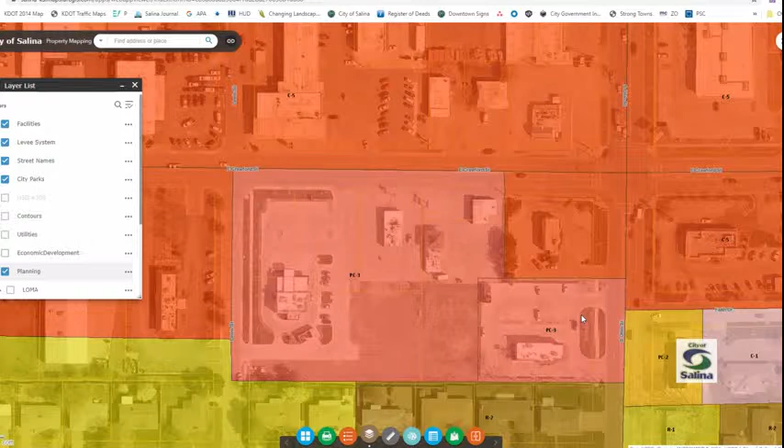That R1 property was rezoned along with a piece of ground that was also C5, where the Popeyes is currently located. And the reason for that rezoning was to take what we had, a mixture of C5 zoning and R1 zoning, and bring it under one unified zoning district, in this case, PC3. And the reason the PC3 zoning was required is because this area is part of a neighborhood center on the comprehensive plan. So we went from C5 and R1 to PC3. And that happened in April of 2018. So a lot of you will probably remember that.

Along with that rezoning to PC3, it did a few things. One is it brought forth the C3 bulk regulations and land use limitations and permitted uses. And it also required that any new development have a final development plan that is reviewed by the Planning Commission. Another condition of that PC3 zoning was the completion of the shared access road that is on the south side of this development, and we'll get into that when we get into the site plan here in a moment. So that's the current zoning of the area and how we got to where we are.

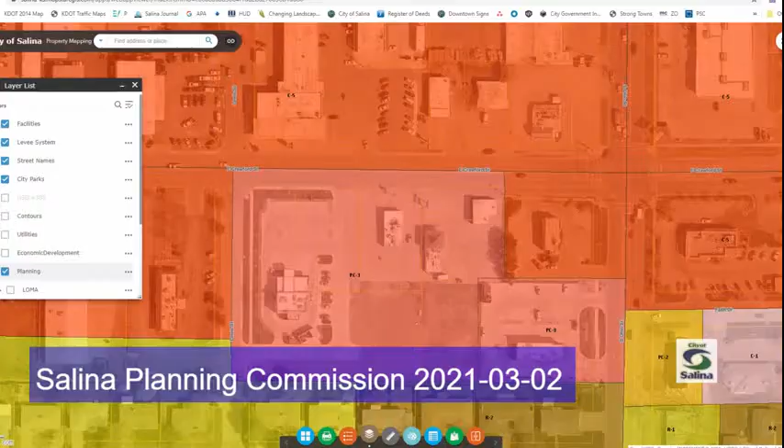The applicant, Mr. Jason Ingermanson, through Reimold Properties, Inc., is proposing to build a new Freddy's restaurant. And the Freddy's restaurant is going to be unique in that the only dining that they're proposing will be covered outdoor dining. So there will be no indoor dining. And the reason that is unique is the C3 district limits outdoor dining to no more than 50% of the indoor dining area. The purpose for that is the C3 district is intended to provide retail and shop experiences while limiting outdoor activities and display. So when you get into uses that have a lot of outdoor display and activities, those uses are usually reserved for a C5 zoning district and are usually prohibited in the C3 district.

And so in this case, we have an application for 100% outdoor dining, which the current C3 or PC3 district does not allow. So the applicant's seeking two things that you're going to be looking at and deciding on. The first thing is an amendment to the existing PC3 zoning to allow for unlimited outdoor dining, or 100% outdoor dining. And the second thing you're going to be reviewing is the approval of a final development plan that's going to incorporate a site plan, landscape plan, as well as building elevations that we'll look at.

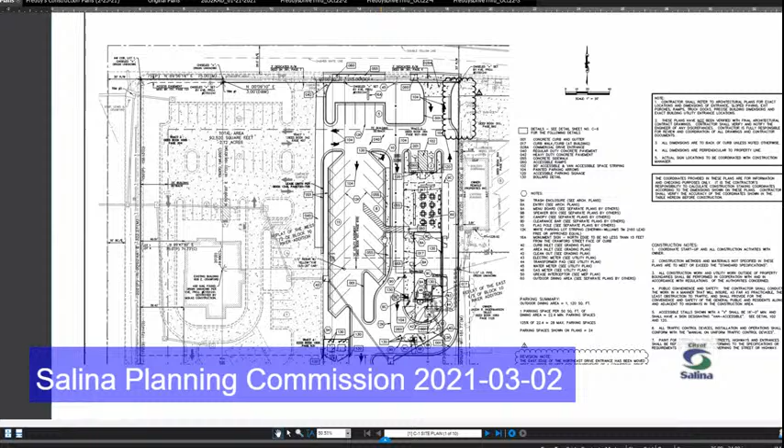In looking at the utilities, the site does have a number of utilities already in place that won't need to be upgraded or changed. So there is a 30-inch water line that is underneath Crawford, and that is paralleled by a 6-inch domestic access service line. There's also an 8-inch sanitary sewer that runs on the south side of

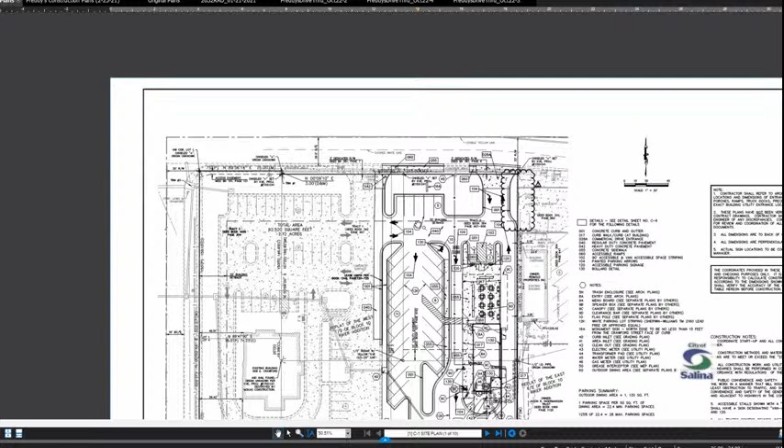And for drainage, there's a 24-inch storm sewer system underneath Lewis and Crawford, and it's collected at the intersection over here. You can see some of those details in the site plan where that stormwater runoff is collected and then goes into the public system for drainage. The Riker addition, which this property is part of, was platted prior to 1980 and therefore is not subject to any stormwater detention requirements or special drainage studies.

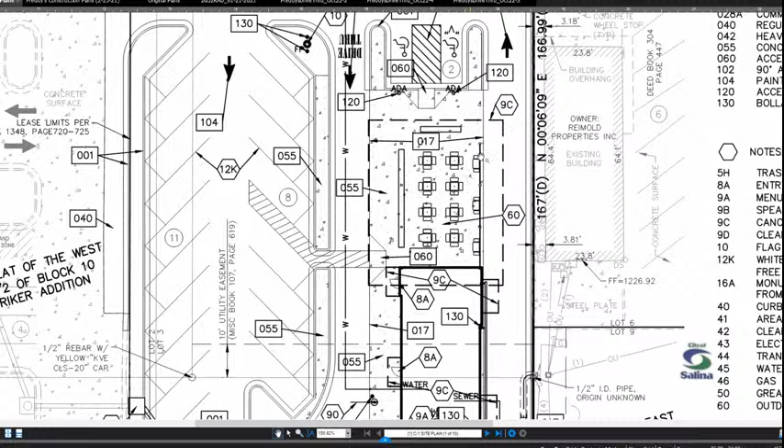The building itself is oriented north to south primarily. We have a canopy, which is this dashed line that you see here in the site plan. As I zoom in a little bit, I'll try to get it a little bit tighter yet because it's kind of hard to make out. We have 41 feet of frontage that face Crawford, and then our depth, we have 104 feet from the north edge of the overhanging canopy to the south edge of the building.

The building is accessed through two doors that are on the west side and face the parking lot. So the parking is primarily on the west and northwest side of the property and is separated from the drive-through area by a raised curbed island area. So there's a little bit of a refuge area for pedestrians as they go from their motor vehicles and they're walking to the restaurant. The two doors that face west are for two purposes.

The south door is the entrance for the employees that are going to be working inside the kitchen and providing service to the customers and patrons. The north door, which is shown here, is the restroom that is accessible from an exterior door for people that are coming to eat and enjoy the Freddy's service and food.

On the east side, you have two windows, two drive-up windows, one for paying and taking care of your business transaction, and then the other is the actual pickup window. And there's also an ordering station on the southwest portion or corner of the drive-through. So the drive-through looks like this, where you come in the entrance and you come around the west side of the building, then around the south side of the building, and then the east side.

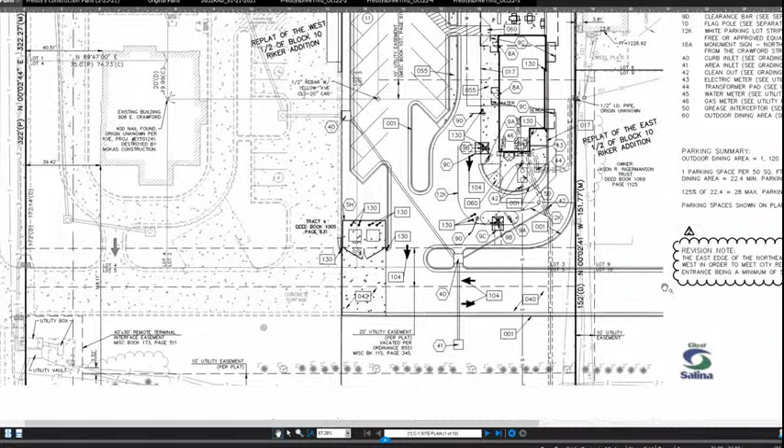And the east side is where you pay for your food and you pick up your food, and then that directs you straight out of the exit. So you can exit directly out into Crawford, or you could loop back around the parking lot and access the shared access road, which will give you direct access to Lewis. Or if you're looking to take a right turn south on Ohio, you can actually go through the Popeyes lot further to the east and take a right out on Ohio.

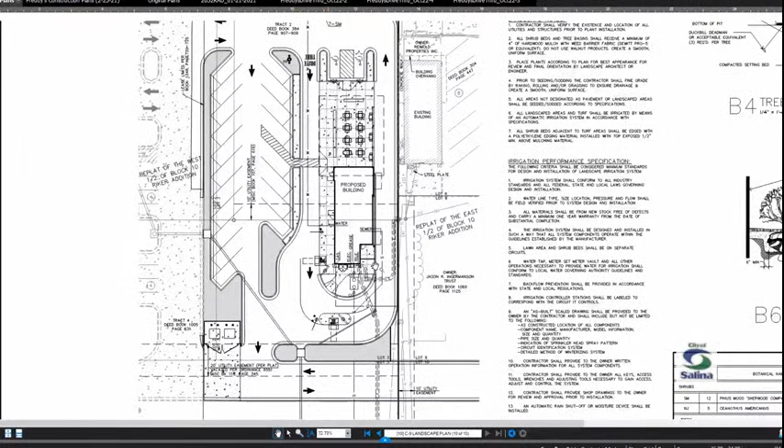When we look at the area of paving and building and landscaping, what we see is that the building is 3,400 square feet, and that amounts to a little over 8.5% of the total lot. Then the paving area equates to 25,728 square feet, which is over 65% of the total lot, with the remainder, 10,194 square feet, being composed of the landscaping, which you'll see is the shaded area on this landscape plan.

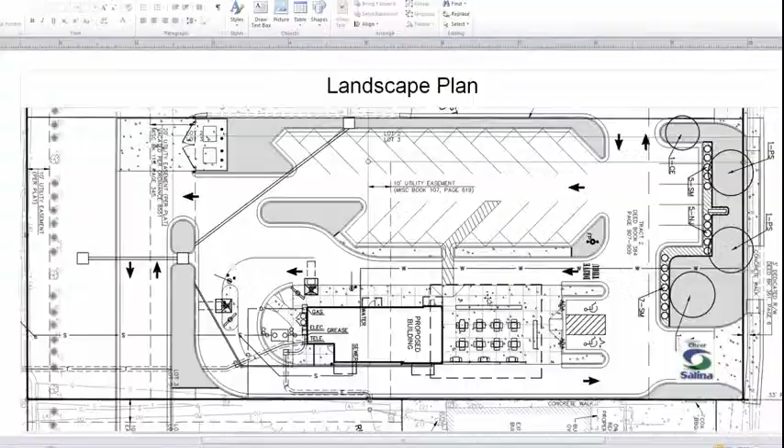Looking at building design, we do have the applicants who will help us with this a little bit, but we have a situation where we have elevation drawings, but they're black and white, and we have some color renderings, but they're not the most current model that's being proposed. And so we'll have the applicant help us paint the picture of what's different between the two, but I'll do my best to fill in until we hear from the applicant.

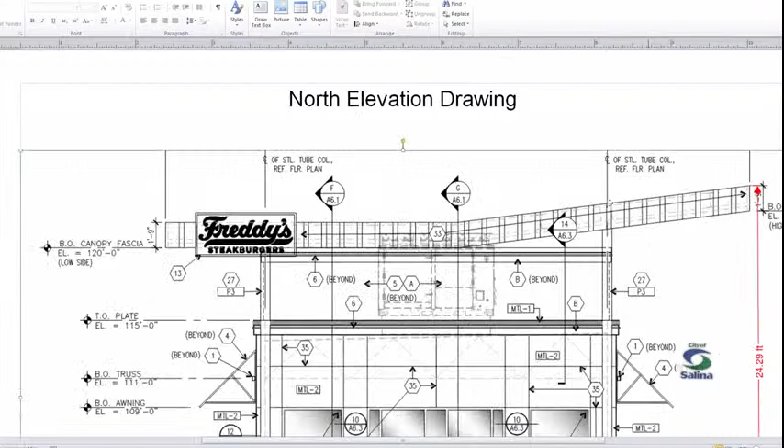So here's the black and white version. I'm going to take you to the color version first, simply because I think it helps give us some context, even though it's not 100% the same. It's going to take a moment for it to load up here.

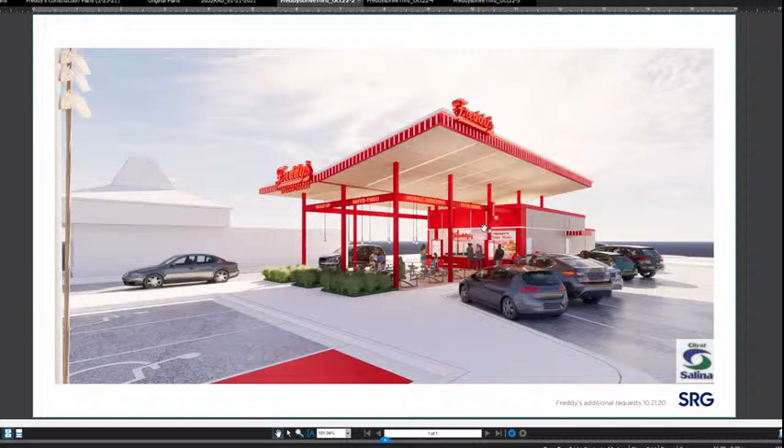That's a good looking building. Yeah, it's still waiting. Oh, there it is. All right.

So this is the color rendition that we were given initially, and since then, a different model has been selected for Salina. But I think the canopy is going to be fairly similar to what is being proposed. The difference being, I think there will be a cabinet sign on the north face, just on the north face, that has a Freddy's rather than the channel letter signs that you see on this particular model.

And then the front of the building, about where my cursor is, the bottom 4 feet is going to be a red brick masonry on the model that's being proposed by the applicant, which is different than what we're seeing here. I think the windows are probably the same or very similar. And then there is an architectural red metal paneling on the north facade above the brick, which is going to be similar to what you're seeing in this rendition here.

And then the brick wainscot will wrap around the side for a little bit of distance where my cursor is. And then the awnings are a little bit different on the model that we're looking at compared to the rendering that we have in the photograph here. So now I'm going to go back to the black and white and see if we can properly describe those differences or see those differences.

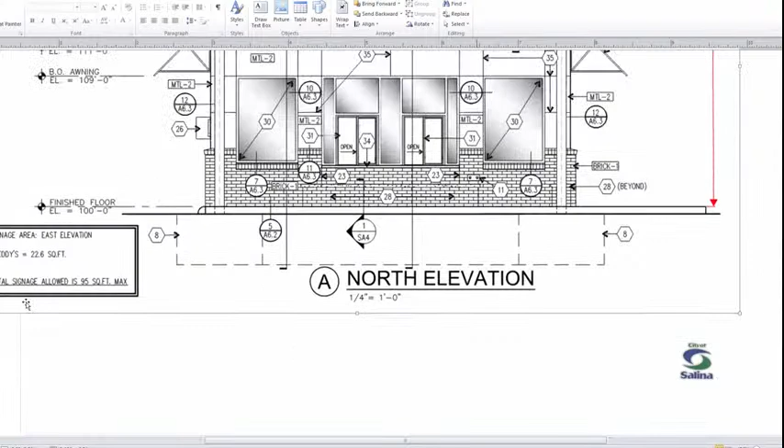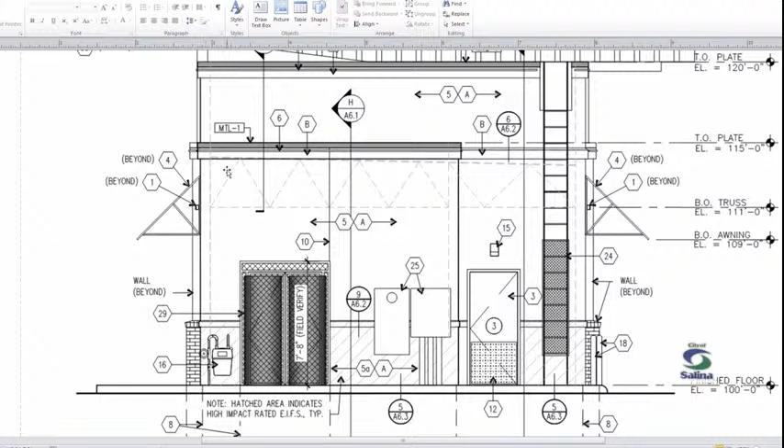Get to the south. South elevation is primarily going to consist of an EIFS material that is going to be a khaki color. And I don't know that there's much else to be said about that. There is going to be a mixture of what I understand to be white horizontal paint colors with an elevated architectural texture to it, or an elevation change at the top, as well as some red coping.

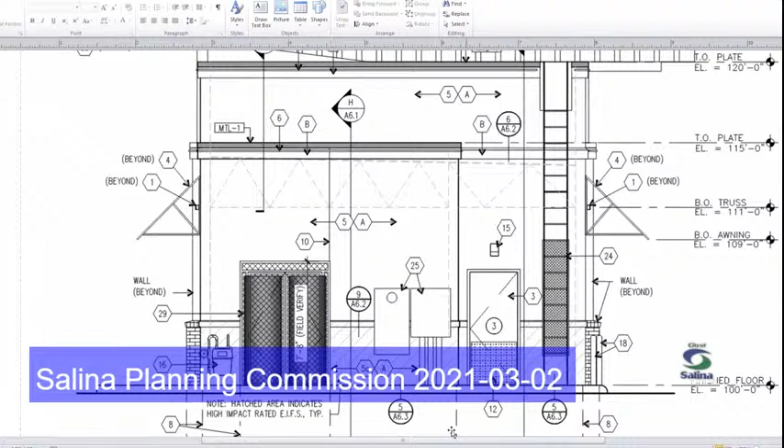Very... see the shaded area. I'm understanding that to be a red metal coping that's going to cap the walls. And that is probably pretty similar to what we see in the 3D renderings.

Here we have the east elevation, and the east elevation has the drive-through windows, the one where you pay, as well as the one where you pick up your food. The awnings here appear to be a red with white striping, and they appear to be more of a slanted architectural design versus the horizontal awnings that you saw in the 3D rendering.

And then as you get towards the north end, you pick up the wainscoting of the red brick. And then you have the canopy to the north of that with the outdoor seating. And there's an iron railing that creates the edge or the buffer between the drive-through area and the dining area.

On the west elevation, you have the restroom entrance, which is the north door, and you have the employee entrance with the south door. And then you also have those same awnings that match the awnings that are on the east side above the drive-through windows.

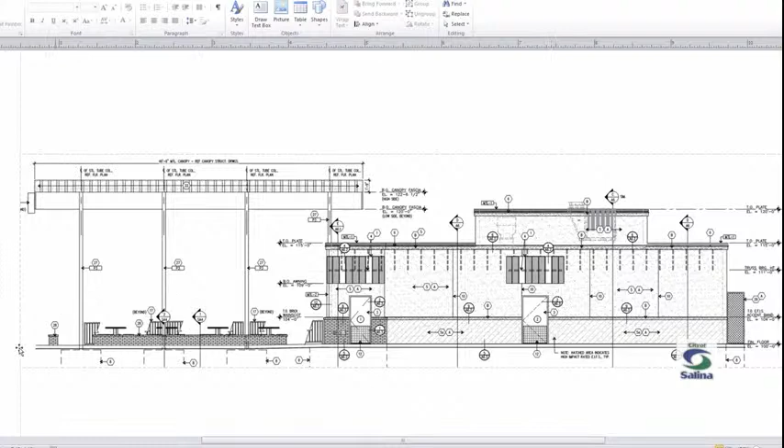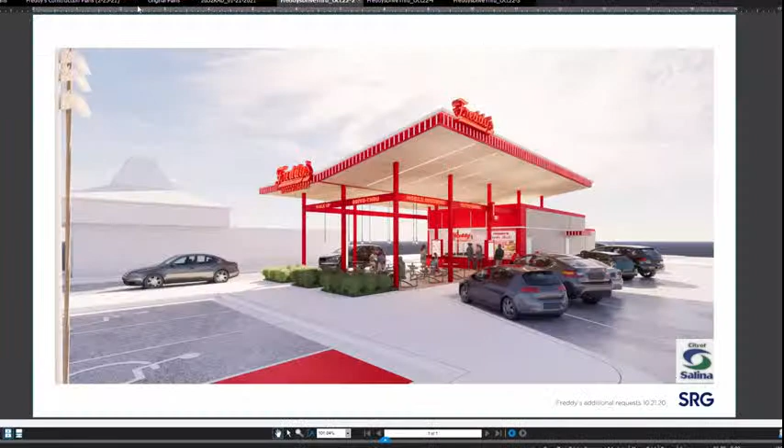For off-street parking... Dustin, what's EIFS? So EIFS is an insulation product that is a finish that looks a lot like stucco. Okay, so it has a texture to it, but for the most part, it's a smooth texture, and it can be colored a lot of different ways.

Let me see if it shows up well in the rendering. This rendering maybe shows a little bit better, but it has a flat surface to it. But if you look at it closely, it's going to have almost like a stucco texture to it.

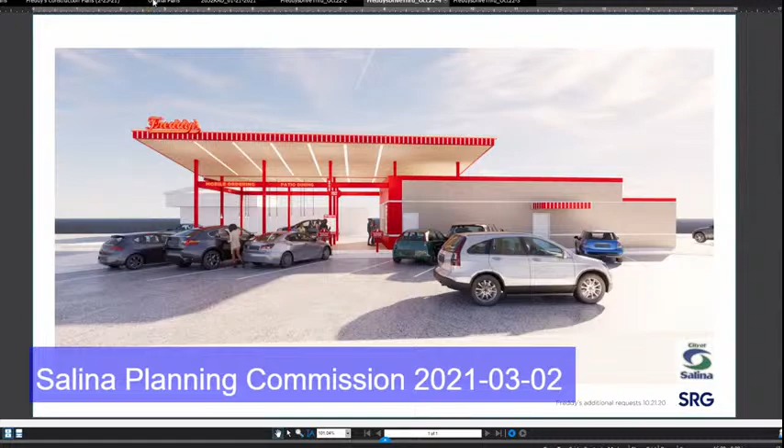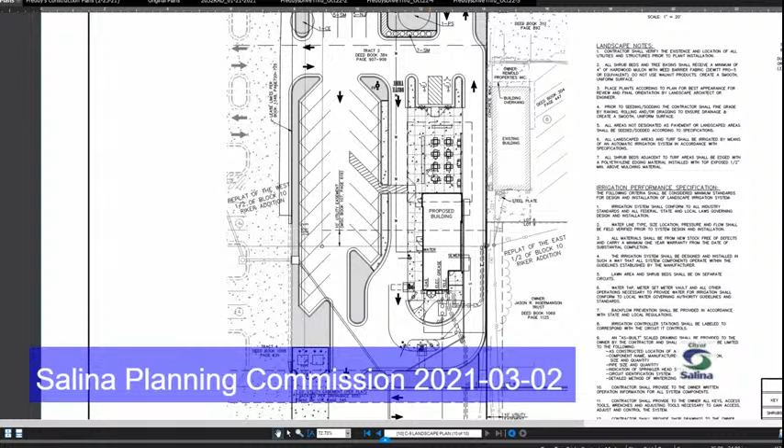Okay, so I think we were at parking. So for parking, this particular property is a restaurant, and for restaurants, we require 1 parking space for every 3 seats, or 1 parking space for every 50 square feet of your dining area. So in this case, the dining area is the larger of the 2, so that's what we use.

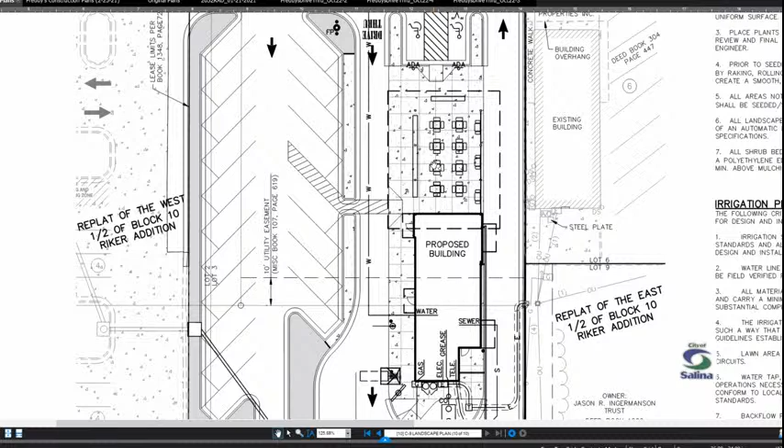We have over 1,100 square feet of outdoor dining area, which requires 22 off-street parking spaces. The site plan that's being proposed has 24, 2 of which are ADA handicap accessible. So that would meet the required off-street parking and actually exceed it by 2 additional parking spaces.

Site plans for restaurants are also required to have a loading, unloading area for supplies such as food and materials and things like that that are required for their service operations. And in this particular case, the applicant has provided us with a written letter on their letterhead describing that their deliveries of their supplies are going to take place during off business hours.

And so they don't have a dedicated loading, unloading zone, but there is plenty of space within the circulation of the site for that loading and unloading to take place during off business hours. Landscaping: this site is required to have 2,460 square feet of landscaping area. The proposed plan has a little over 2,500, so we do meet the landscape area requirements.

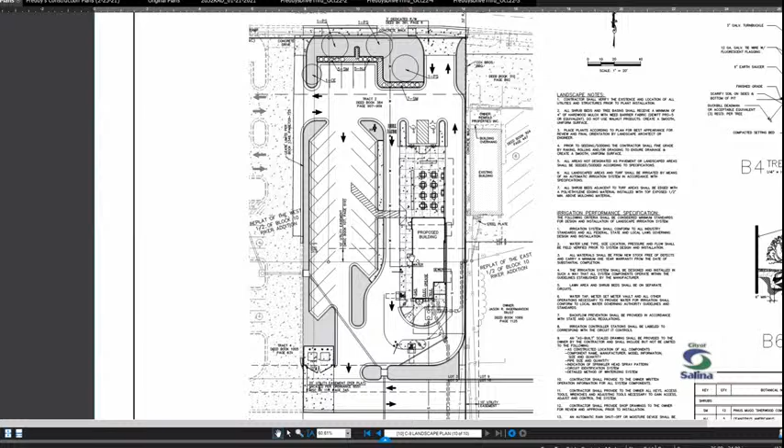There's also, in addition to the front yard landscaping area, 4 islands and peninsulas within the site that add an additional 2,500 square feet of landscaping area. And the front yard area that is along Crawford is enhanced with 4 shade trees and 17 shrubs for parking lot screening.

In addition to the landscaping that takes place in the front yard and throughout the site, there's also a 39-foot wide buffer towards the south between the shared access road and the south property line. And that area has already been landscaped and screened as part of the first phase of the redevelopment of this property that took place with the Mocha's development. So if you go out there today, you'll already see a number of screening plantings in that 39-foot buffer.

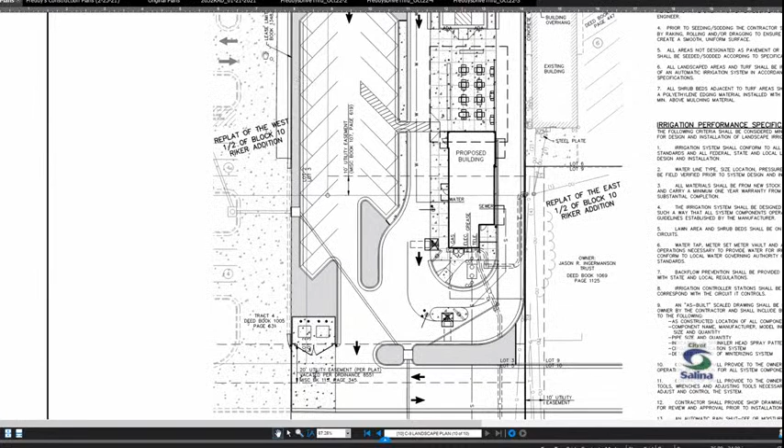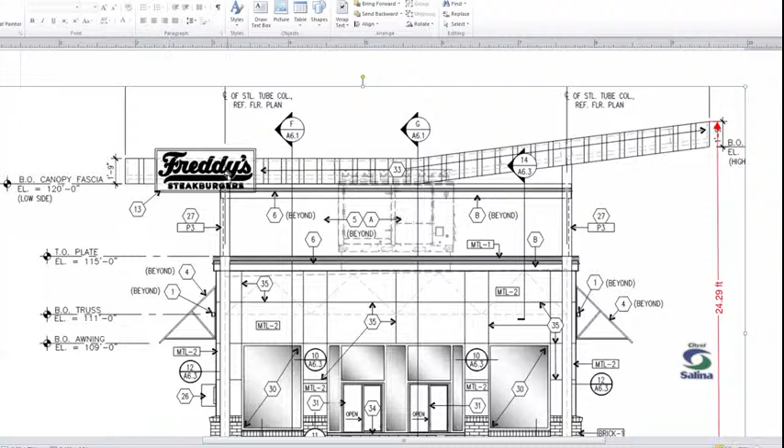Looking at signage, the C3 district allows for 4 square feet per lineal foot of building frontage. And as we saw in our, I'll go to this elevation because it's easier to see. In our elevation on our north frontage, there is a wall sign that's being proposed that's a little over 22 square feet. And so staff would ask the applicant to clarify if there's any additional plans for additional signage.

There does appear to be, on the landscape plan, up here, a sign out in front, whether that's a ground sign or a pole sign. It's a little slow on your end. We would seek clarification on that. And we would also note that all signs are required to have a sign permit application.

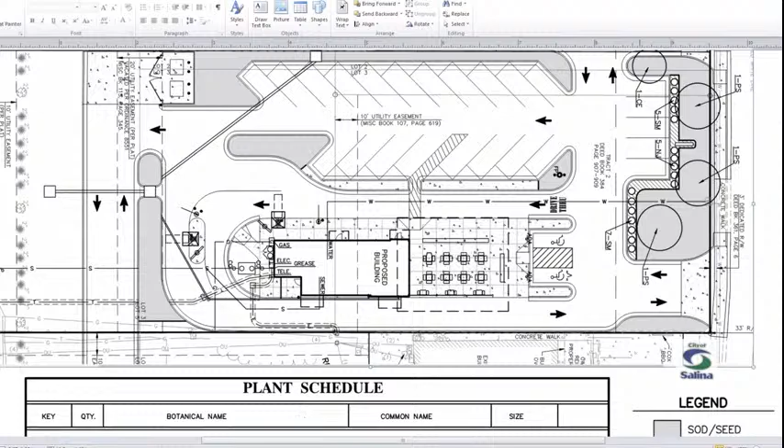And so one thing that we are required to do when we are looking at planned districts is there's a checklist of sorts that we are required to go through. And I've got that pulled up on the screen that you'll see in a moment if you don't already, because it takes a little bit. And what that looks like is there's a number of criteria, 8 of them in all. And what I've done is I've kind of summarized what I think the plans represent and how the proposed plans meet these 8 criteria.

So the first one deals with the allowed uses and the permitted uses and conditional uses and whether or not they're permitted in the applicable zoning district. In this case, we're dealing with a planned C3 district, which does allow for restaurants as a permitted use. So that takes care of that. For number 2, the proposed Freddy's restaurant development meets all bulk regulations and use limitations within the C3 district. The only exception is the outdoor dining limitation, which the applicant is requesting an exception or waiver to in order to have 100% outdoor dining.

Number 3, the proposed Freddy's restaurant site development plan conforms to the city's landscaping and screening requirements, providing sufficient off-street parking, and has a site lighting plan that should minimize any impact on the surrounding properties and is compatible with the surrounding neighborhood. And lastly, the Riker addition at this location is a pre-1980 subdivision and is not part of a critical drainage area, so a drainage study is not required and no additional drainage requirements are required.

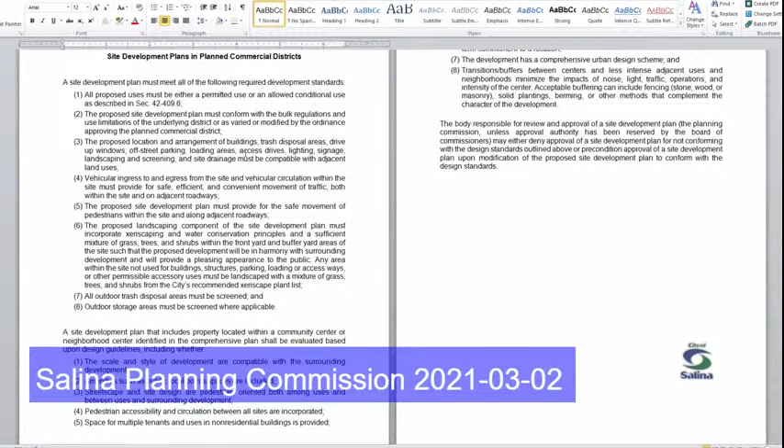Additionally, the proposed development plan completes the construction of the shared access road to the south, connecting the existing Popeye's site with Lewis Street to the west, and consolidating the existing curb cuts and completing the shared access road located south of the building should greatly improve the property's access control and traffic circulation for the site. The drive-through also has 13 stacking spaces, which exceeds the minimum of 8 that the code requires.

Number 5, the site development plan for Freddy's has pedestrian access across a parking lot as well as a curbed island area as a refuge area for people that are crossing the parking lot and crossing the drive-through area. There's also an existing sidewalk along Crawford for pedestrians. For landscaping, the site has sufficient landscaping area in the front yard as well as a rear buffer that exceeds the minimum requirement by 24 feet, as it's 39 feet wide and the minimum landscaping buffer is 15. The site also has adequate front yard plantings with 4 shade trees and 17 shrubs.

And for number 7, the development plan for Freddy's proposes adequate screening with a 6-foot, 8-inch tall trash enclosure that will consist of brick wainscoting and CMU covered stucco finish to match the design characteristics of the Freddy's restaurant building. And lastly, number 8, the Freddy's restaurant proposes an outdoor dining area on the north side of the restaurant, which the applicant is requesting an exception waiver for, but does not propose any outdoor storage that would require screening. So as staff goes through the punch list of items that a planned commercial district is required to meet, we believe that the proposed plan does meet all of those requirements.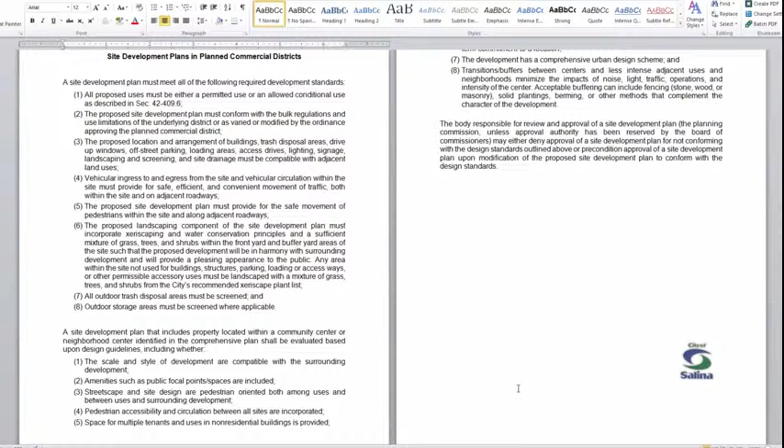So on page 14, we have a list of the review process as well as the Planning Commission's alternatives. We have 2 actions that we need to consider. And I think what staff would recommend is that the Planning Commission approve the amendment to the PC3 zoning district to allow for 100% outdoor dining as is being requested by the applicant. And we also would recommend approving the final development plan with a number of conditions. With those conditions being, number 1, the construction of the rear shared driveway, which I'll pull up here, be completed as part of this project and during this phase.

That signage for this property be limited to 1 pole or ground sign with a maximum area of 120 square feet. And that all landscaping, sidewalk, circulation, parking, fencing, and other improvements shown on the approved site plan be completed prior to occupancy of the building. And number 4, that the project shall be completed in substantial conformance with the approved final development plan, including all landscaping, associated sign and building elevations that are hereby incorporated by reference. And lastly, condition number 5, that a building permit for this project be obtained within 18 months of the site plan. So with that, staff will take any questions, or we can look at any of our graphics and talk about those.

I have 2 questions. The trash pickup, is there adequate room for trash pickup? And then will that be done during the day or at evening? And if it is at evening, isn't it quite noisy for the neighbors to the south? I'm going to pull up a graphic here so we can look at it.

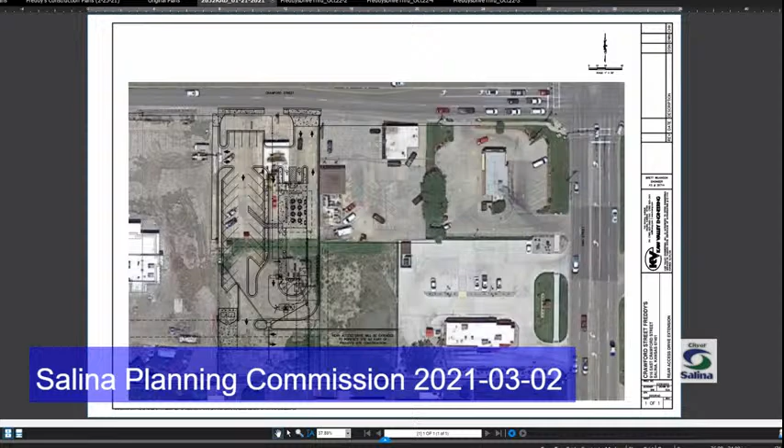So the location of the trash enclosure is actually in the southwest corner of the property. There is sufficient room for pickup and drop off of it in terms of it being accessible. In terms of the proximity to the neighbors, I'll get a measurement here. So you're looking at 52 feet between the trash enclosure and the south property line, with 39 of those feet being the landscape buffer. I don't know when trash pickup occurs on the site.

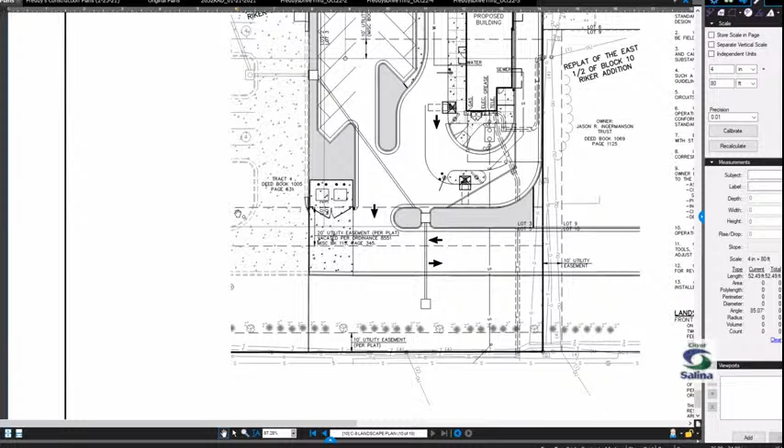That's a good question for the applicant, because I do know that they have trash service in a similar location just over here to the west a little further. And so knowing when that takes place could be helpful. And we could certainly take that into consideration and hear from the applicant on when that's going to take place.

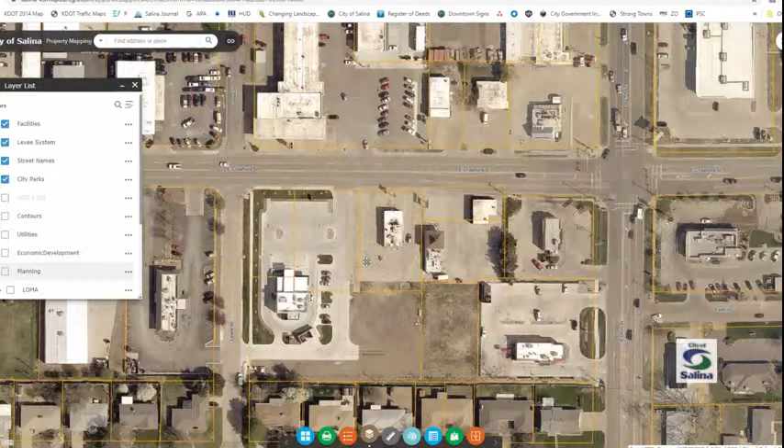Okay, and then they're showing a plant buffer just north of the residential area. Is that in place, or is that part of the project? Yeah, that's currently in place. Let's see if this gives us a decent view. So this is about a year old, maybe. So the old Mocha's is still here in this photograph. As you can see the old building. You can see the former curb cuts.

You have a curb cut here and a curb cut here that are being removed and consolidated into one. And you also have the road that has been constructed up to this point, which is going to be finished all the way out to Popeyes. And you have the landscaping buffer area, as well as the plantings that have been installed during the first phase of that construction when the Mocha's was built. So the next phase will include the extension of the access road all the way to Popeyes, and the maintenance of the existing landscape buffer that's currently in place.

Here you can see in the photograph the existing trash enclosure for Mocha's, which is in a similar area, or at least close proximity to where the proposed one is. The proposed one is about where the hand cursor is in the photograph. So this would be the rough location of the proposed trash enclosure.

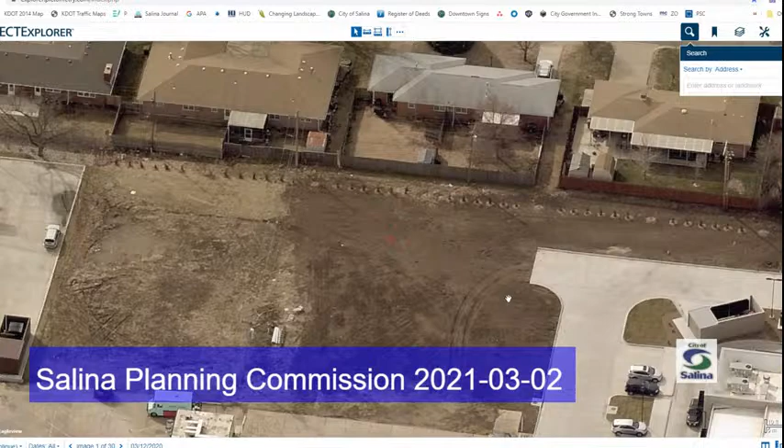And then also, isn't there a flooding concern on Ohio and Crawford in heavy downpours? Well, we do. I believe Dean Andrew is on the call with us, and he can speak to a little bit. What I can do just to help add context to the area is see if I can pull up the stormwater lines just so that you can see what they look like in the area. There is a 24-inch line that goes underneath Lewis and Crawford intersection here, and there's a number of inlets around the intersection. That's what these boxes are. And so we do have a stormwater system in the area.

As to how adequate or how well it performs, I can't speak to that, other than to mention this, that the proposed development will have landscaping that a lot of this previous development didn't. If you'll recall where the old Mocha's is, the Coop's Pizzeria and the businesses that are to the east, and the former buildings that were at the corner of Lewis and Crawford, none of them had landscaping. And so as Mr. Ingermanson goes through and redevelops this area, he is adding landscaping both in the front yard areas as well as island areas to help reduce some of the stormwater runoff. But I'll let Dean, if he's on, respond to any drainage concerns that he might have.

This site, the runoff from this site will not go to the Crawford, Ohio intersection. That storm pipeline at Lewis runs directly north and drains directly into the Smoky Hill River cutoff channel. And so the water from this site will go directly to the cutoff channel, not to the Ohio Crawford intersection. Thank you, Dean. There are no further questions.

Any other questions from the commission? Yes, John, I have a question for Dustin or Dean. The report states that traffic will not be increased substantially. I was just wondering how that was determined. Well, it was determined by, if I can pull up the aerial photo and

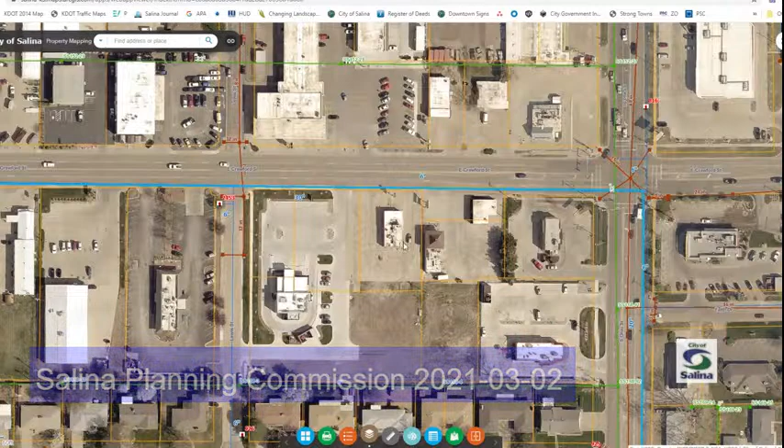essentially, it was an assumption made that we are going from a single restaurant that was on this property before and replacing it with a single restaurant. So it's a like-for-like replacement. And we've improved the access to the site as well as the circulation of the site, because the size of the property has virtually doubled.

Because as you see, the outline of the parcel tract that was the former Mocha's, we are taking that and extending it all the way to the south property line now. So increasing the area in which that activity takes place by twice, basically. And so the use itself isn't a different or more intensive use, because it was a restaurant before and it's going to be a restaurant now. And we're increasing the area and adding better site circulation and access.

So that's how we justified that the changes or impact to the traffic in the area would be minimized. Okay, thank you. Okay. Any other questions for staff? If not, then can we hear from the applicant?

Yeah, hi, everybody. My name is Chris Hitchcock. I'm with JRI Hospitality, which is representing the applicant, and our civil engineer, Brett Wilkinson, is also on the line. Open for any questions. Just as a little bit of background, this drive-through Freddy's prototype will be the first trial for Freddy's corporate in the country as a drive-through outdoor seating concept only. If you guys know JRI, we're based out of Salina. We're a very large Freddy's Frozen Custard franchisee.

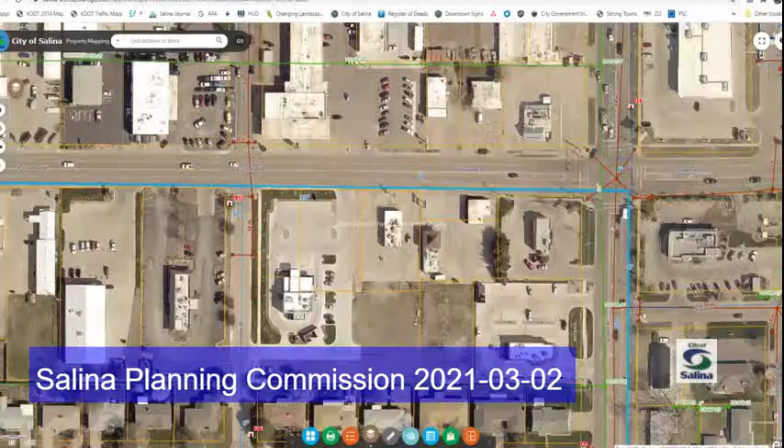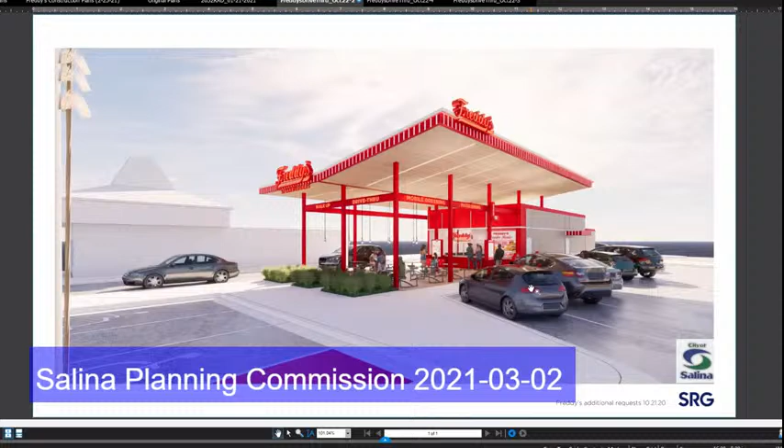And the design changes from the color renderings to what the black and white renderings were more in conjunction with matching what our existing prototype is, as well as some of the signage changes you see in the black and whites versus the color. As Dustin mentioned, there's no color variations in anything, and they're minor changes, and I can assure you that most of the changes were due to making it more aesthetically pleasing than what you even see here.

Okay. Is there going to be any heating underneath the awning? That is a good question. I can't answer that. To be completely upfront with you, I kind of came in a little late on this project. It's been a project that Freddy's Corporate and JRI have been working on for probably six months, but I certainly can get that answer. Like a low wave radiant heat would extend your season quite a bit. Oh, for sure. Yeah.

Okay. Any other questions for the applicant from commission? Okay, we're going to open it up to comments by interested citizens. So Dustin, do we have any citizens on? I'm looking. I believe everyone I see is associated with the project, either as part of the design team or as part of the commission or staff. But if I am incorrect, then somebody please raise their virtual hand or wave, and we'll get you noticed. So no, I don't see anybody from the public.

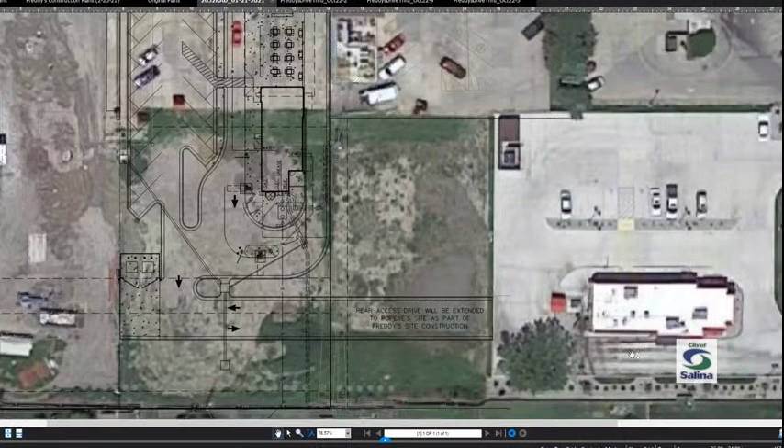The other concern that dates back to the Popeyes project is, with Popeyes being a right out only, that leads to the consideration where people could exit Popeyes, turn on Millwood, go through the residential area to get to Lewis or Roach, to get back to Crawford. And so that southern access road and tying that back to Popeyes is to provide an alternate way to get to Lewis without having to drive through the residential neighborhoods.

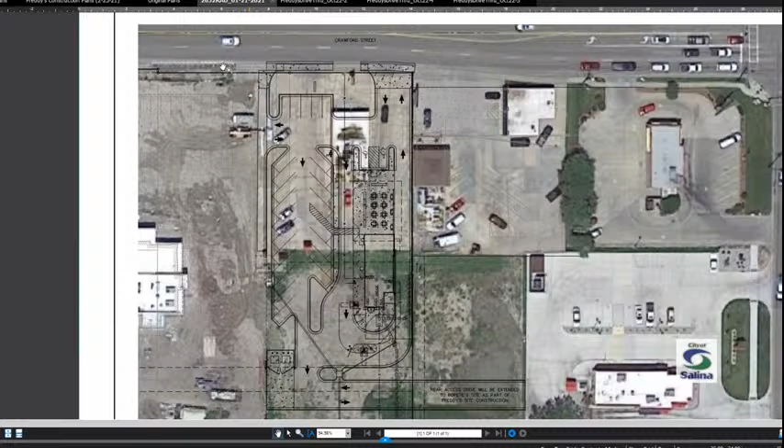So, Dustin, can you put that picture back up there? Yeah. The drawing. So at the top, northwest corner of it, it also looks like there's an entrance into the Mocha's parking lot, where there's an entrance off of Crawford Street. Where's that entrance off of Crawford Street for the Mocha's parking lot? It's where my cursor is, and I'll bring up an aerial photo here that will also help.

So here's where it looks today. The proposed Freddy's is over here. So you have the existing one for Mocha's here. This one is being closed off. This is the curb cut that's being eliminated on this particular property. And then the east curb cut will be the one that is utilized for accessing the site.

Okay, so they can actually exit this property to the north on Crawford Street, either from that cutout or from the Mocha's cutout. Right, because both sites will be connected. Both sites will be owned by Jason Ingram Anson through Reinbold Properties. And so the site plan does have interconnectivity, both with the shared access to the south, and there's also a connection point between the two sites that I'll bring up here. So you can see that on the site plan as well.

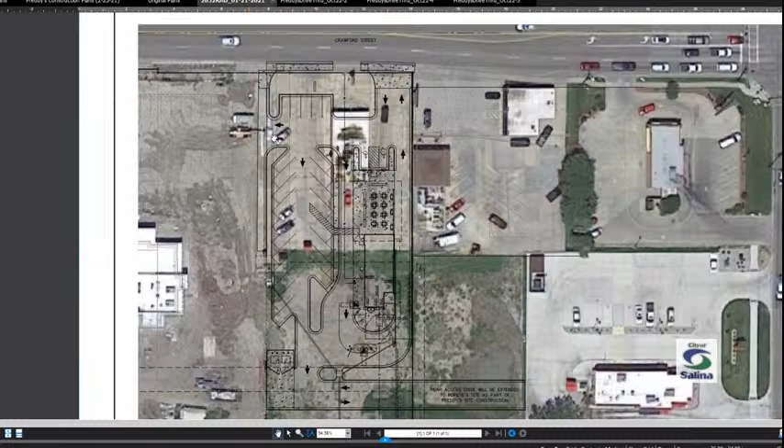All right. We still don't have anybody from the public, correct, Dustin? Correct. All right. So we're going to close the public comment portion of the hearing, and we're going to move to commission discussion and action. So any comments? Thoughts? So what we're looking at is that the first thing is an amendment to the PC3 to go 100% outdoor dining. Correct. That's the first action. Okay. And the way you've structured that, Dustin, you've allowed that to be done in a single motion.

Yeah, bottom of page 14, I do have a number of alternatives and options for you that take care of the action simultaneously. If you're looking to approve the PC3 modifications to eliminate any limitation on the percentage of outdoor dining, and to also approve the final development plan, you can do that with either options 1 or 2. We would probably recommend number 2 because we do have a number of conditions that we would recommend, on the bottom of page 15. So we would suggest option 2 and the 4 or 5 conditions at the bottom of page 15. So a commissioner could simply make a motion to adopt option 2 with the conditions recommended by staff.

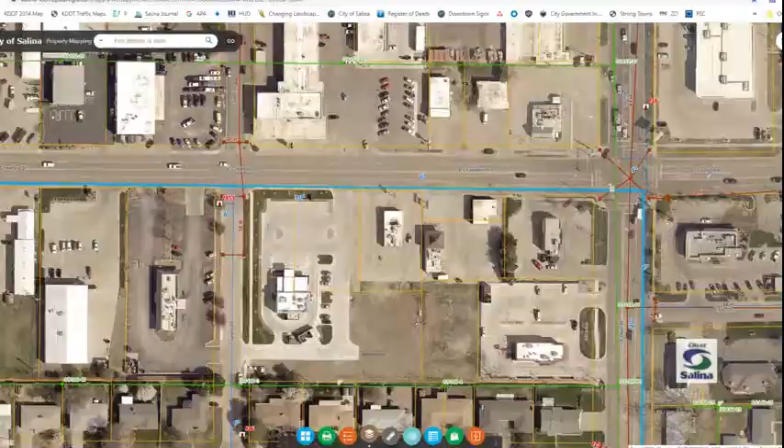The most recent plan approved prior to this was for the Chick-fil-A restaurant. And this is the first time we've gone north of the access road that comes in, often referred to as the Dillard's access road, although Dillard's is no longer there and open. But this is on the north side of that road.

And the applicant is requesting approval of a final site development plan to allow development of a 7,488 square foot Discount Tire service store. The building will be oriented in a west to east fashion with the main building entrance facing west towards South 9th Street. There'll be a secondary building entrance facing south. And the tire store will have 5 service bays with 3 service bay doors that will face south towards the mall access road. And so the north and east elevations will have blank split face concrete walls with no window openings.

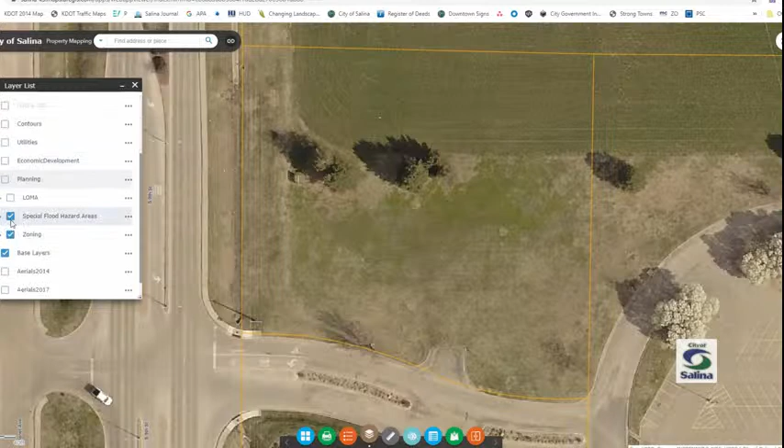I think the thing that makes this a little different than some of the other outlots, although at the time that Taco Bell and Starbucks developed, they were in the floodplain. Also, the city was comprehensively remapped in terms of new floodplain maps in 2018. Those maps still show this tract to be in the 100-year floodplain with a 100-year flood elevation of 1237.60. So in a floodplain condition, any new construction must be elevated to 1 foot above that elevation.

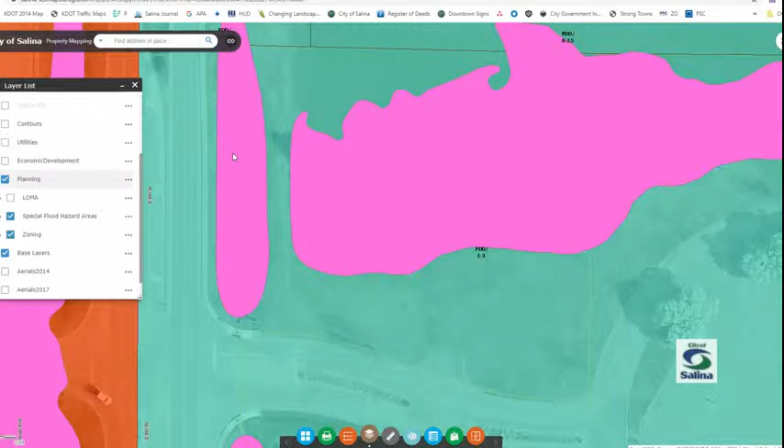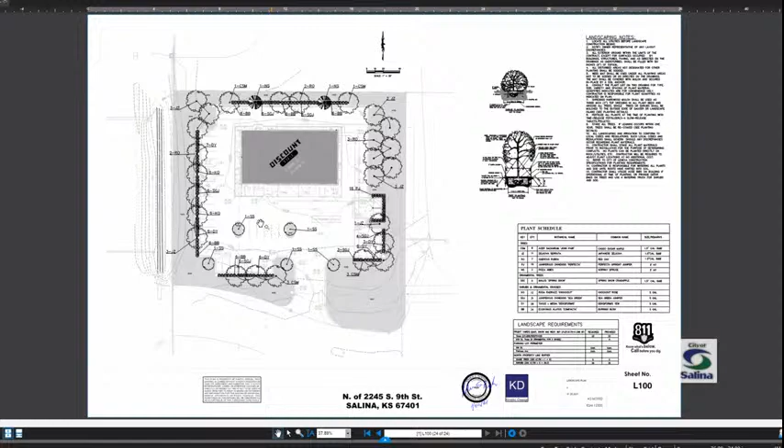So our building site here is a little over 1.5 acres. The building itself is only going to cover 10% of the lot. About 58% of the lot will be paved, and about 31.5% will be left as green space, either landscaped or open green space. We are on step 2 of the PDD process. The original plan for Central Mall was approved back in the 80s, and this is the final development plan coming forward for a vacant outlot.

As I noted, the building will have a main entrance that faces west towards South 9th Street, and a secondary entrance facing south with the service bays facing south towards the mall access road. There's two secondary front yards. The south and east yards are secondary yards, but 9th Street would be considered the zoning front yard. The building would be 64 feet wide, 117 feet deep, would be set back 80 feet from South 9th Street, so it would line up with all the other buildings, Chick-fil-A, Chili's. Those locations are all subject to an 80-foot building line.

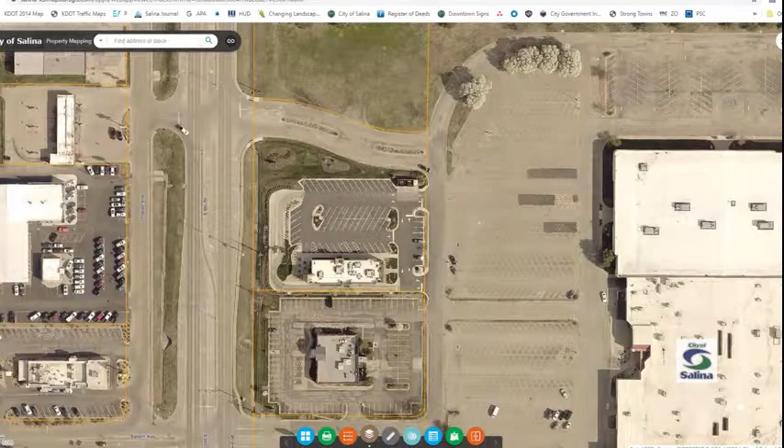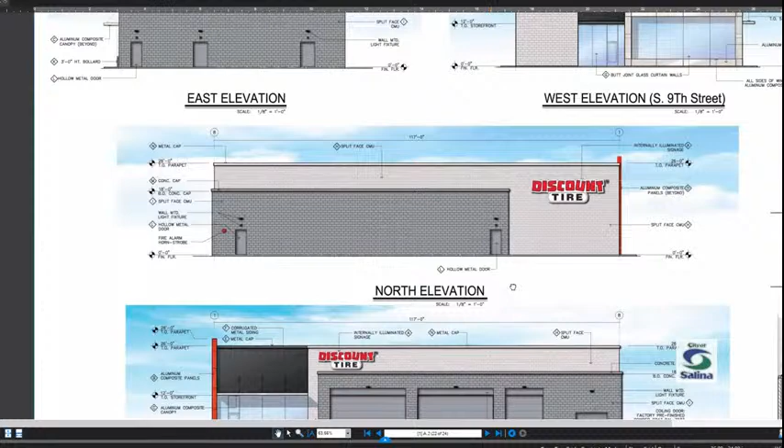There's an enclosed trash enclosure along the east side of the lot. The building facade would be split face concrete masonry that would be tan and gray in color. We'll ask the applicant's representative to confirm that, because sometimes colors can be lost when we get color elevations emailed to us. Sometimes the colors can change or lose a little, so we'll confirm whether we're reporting that correctly. The exception to the split face block would be that there'd be a large glass curtain wall on the west elevation facing 9th Street.

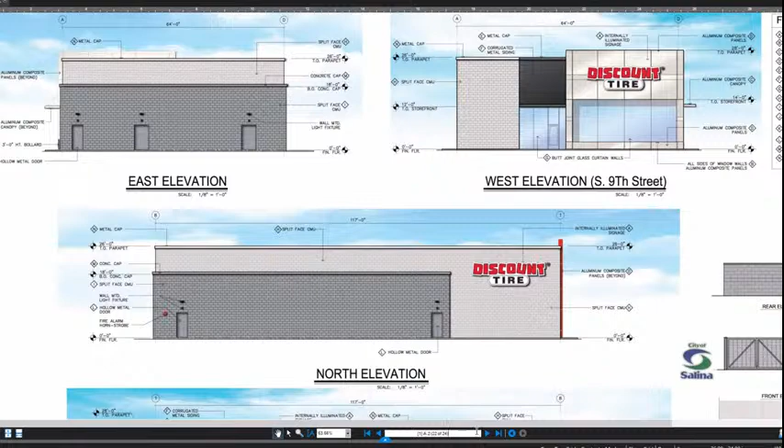We have determined that a minimum of 20 off-street spaces would be required for the 5 service bays and the retail portion of the facility. But the applicant is showing 34 paved parking stalls, and so that exceeds our minimum parking requirement by 70%. So we would like the applicant to provide staff and the commission with some additional information explaining the need for those additional parking spaces.

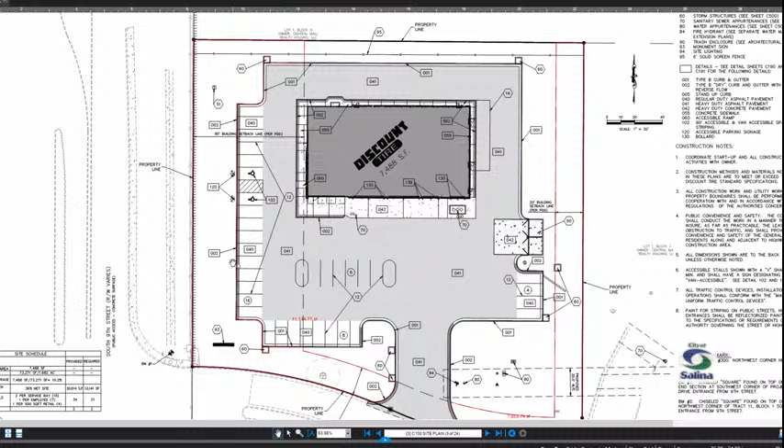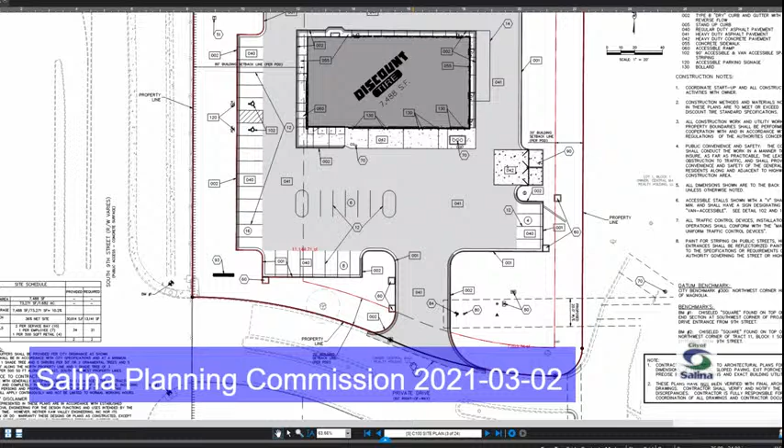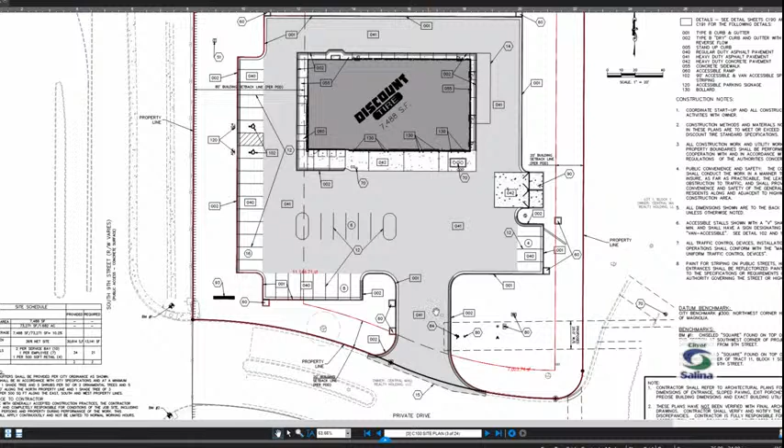Again, the primary access would be from the 9th Street Mall access road, but there is also internal access from the mall ring road. Delivery trucks would use that entrance and off the access road, and there's a loading space proposed along the east side of the building. We have water, sanitary sewer, gas, and electric in place in the vicinity. There is a need to extend a sanitary sewer stub to this building. And then to provide fire protection, there is a plan where the applicant's engineer would need to design and construct a public water main extension and a new fire hydrant that would serve this site.

As far as drainage and stormwater runoff, the pond for the Central Mall is adequately sized for full build out of the mall property. The question is getting the runoff there, and so this site has been designed so it would be graded for the majority of the runoff to go back to the east towards the detention pond. There will be a small portion that will drain back to the 9th Street ditch.

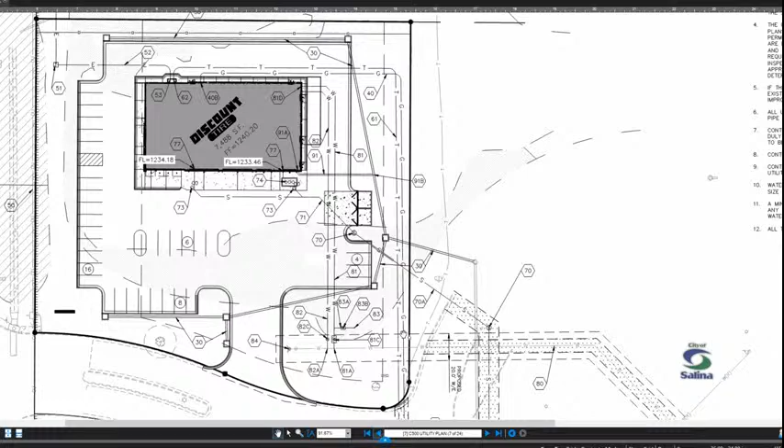The original plan had some runoff going to the northeast, and that is not a permanent drainage solution. So the city engineer asked the applicant's engineer to relook at the drainage plan, and they have reworked their drainage and grading plans. The Central Mall does not allow pole signs, so this would be limited to a single monument sign, no taller than 8 feet, out along the 9th Street frontage.

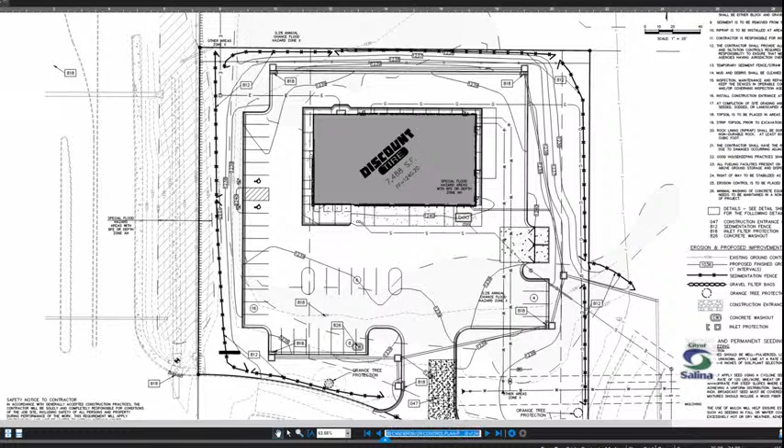And based on the width and depth of this lot, we have determined that there would need to be 11,000 square feet of front yard landscaping in the 3 front yards, and they have 18,000 square feet of landscaped area, so that far exceeds the minimum requirement. And they're proposing 28 tree units, which exceeds the minimum required by our ordinance. So all the way around, their green space and their planting schedule exceeds our minimum requirements.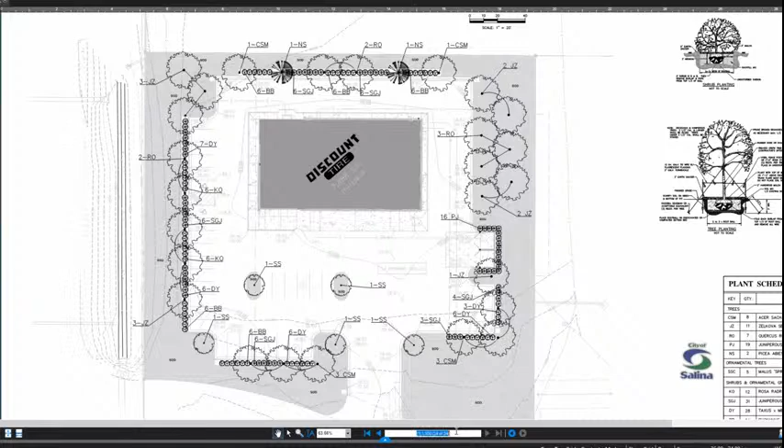The varieties they are proposing were all taken from the city's recommended tree list and xeriscaping plant list. And I don't know if we have an elevation, Dustin, but landscaping regulations require that their trash enclosure be screened, and they are proposing screening around the trash enclosure. So your role is to look at this.

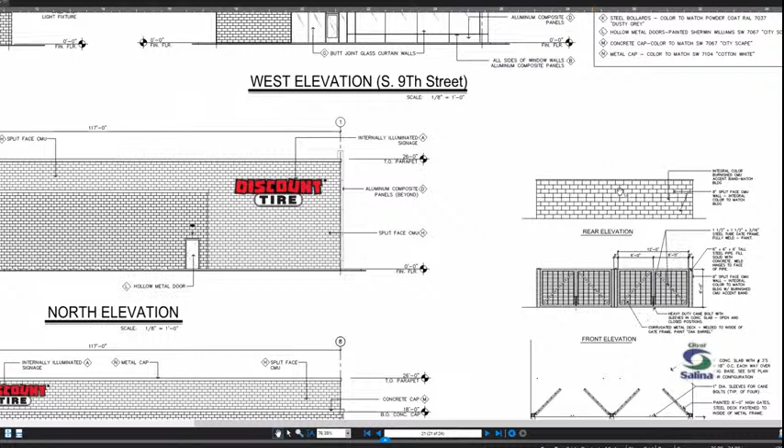We have done our best to review this plan for compliance with city ordinances and regulations and explain how it complies. And your job is to transmit your findings to the applicant, how you find this complies with the city's development standards, and you should either approve or disapprove the plan as submitted. You could approve it subject to certain revisions or conditions, or you could recommend that the plan be resubmitted after substantial redesigns are made.

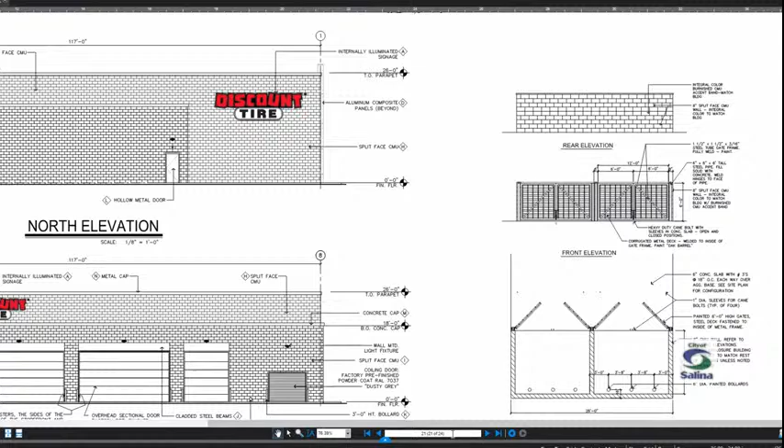After reviewing this, our recommendation is to approve the final development plan for Tract 12 to allow the Discount Tire store subject to the 5 conditions that we've outlined on page 8 of the report. It did seem like we had Kyle Kippis here with the engineers representing Discount Tire. So I guess the 2 things we would ask him to comment on is the redesign of grading and drainage, and also the reasoning behind having 34 parking spaces when the city's ordinances would require 20. So with that, staff would be open to any questions you have.

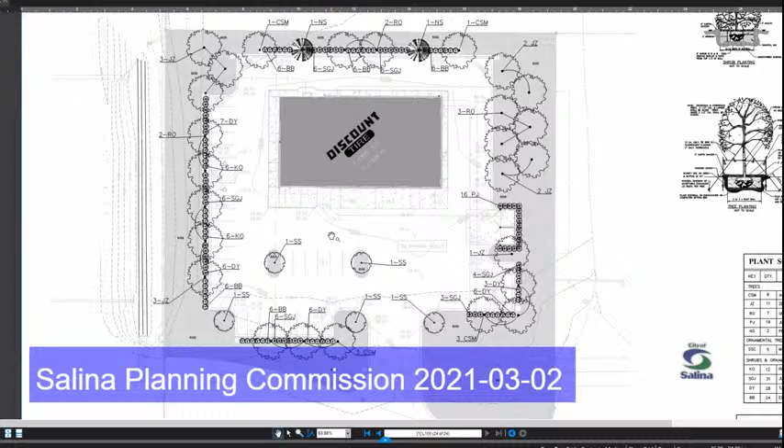I just have one. You talk about the trash enclosure. Now, will all of the used tires and junk tires be in that enclosure also? Well, the C3 district doesn't allow any outdoor storage or display of tires. So the trash enclosure is just that. If they have a trash dumpster, then it would be enclosed by a fence and have gates where Dustin's indicating. So the dumpster itself would be screened from view and have walls and gates.

They would not be permitted to have any storage of tires or discarded tires outside the building because the C3 district does not allow for outdoor display or storage. So what is the applicant going to do with the used tires and stuff that they take off? There is internal tire storage for the used tires. It is on the lower view. Tire storage would be in that small bay door on the far right of the building. Okay, I see. Thank you.

Okay. Any other questions for staff? Yeah. Oh, go ahead. I was just wanting to point out, there's just a landscaper in me here. The trees on this, I'm counting 31 deciduous trees and 21 evergreens with a total of 52 trees going on this property. I just wanted to verify, is that something that is required? And I think that is maybe a little too many for that site. Hey, Derek, this is Dustin.

This site is a little bit unique in that it's part of a planned development district that has three front yards. So you have a front yard along 9th Street, which is the west frontage. And then you have 2 frontages for private ring roads that are part of the Central Mall planned development district, and that's on the south side and the east side.

In addition to that, you have a landscape screening buffer between this commercial property and the residentially zoned properties to the north, and that's on the north side. So it is a little bit unique, you're right, and that's because it has some characteristics that are fairly rare, that requires them to have landscaping literally on all 4 sides.

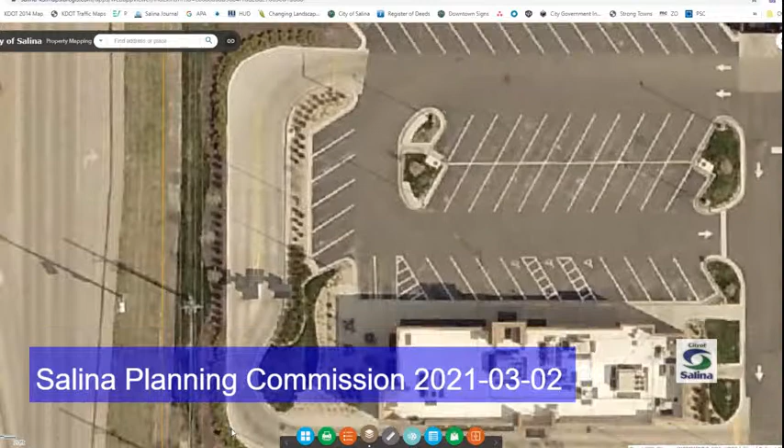And so if we were to go to an aerial photo, you were to look at Chick-fil-A. Chick-fil-A is in a somewhat similar situation where they have 3 frontages. Now they don't have the 4th side where they're adjacent to residential, but if you go out there, they have quite a bit of landscaping along the frontage on the west, along 9th Street, which is their main frontage, and they really put a lot of landscaping effort into that area, and then they also have landscaping to the east along the ring road there.

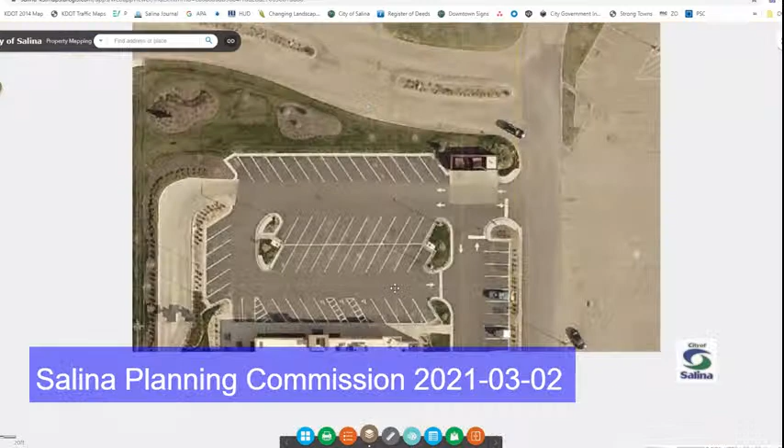So that's where all of that landscaping comes in, and it is unusually intensive when it comes to the plantings that are being proposed and the requirements. But it's because they have 3 front yards, and the one side that's not a front yard is a landscaping buffer for the residential screening.

I would like to say that, talking about the landscaping, the Japanese Zelkova is a good tree, but it's not native, and I'd like to see a native tree replace those 11.

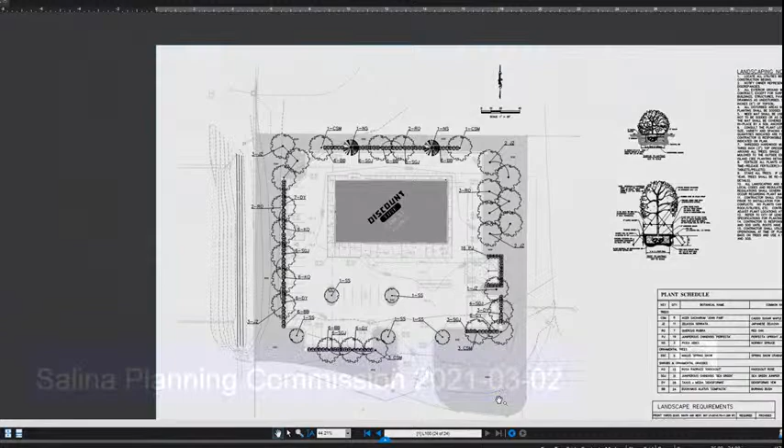Okay. Any other questions? Yes, John. Dustin, can you just give me a rough dimension from the edge of 9th Street to the center line of that entrance? Oh, sure. Let me get a site plan here. So we're looking at 166 feet from the 9th Street property line to the center of the entrance. Okay, thank you. And it lines up roughly with what we have at Chick-fil-A to the south, if that helps. Yeah, okay, thank you.

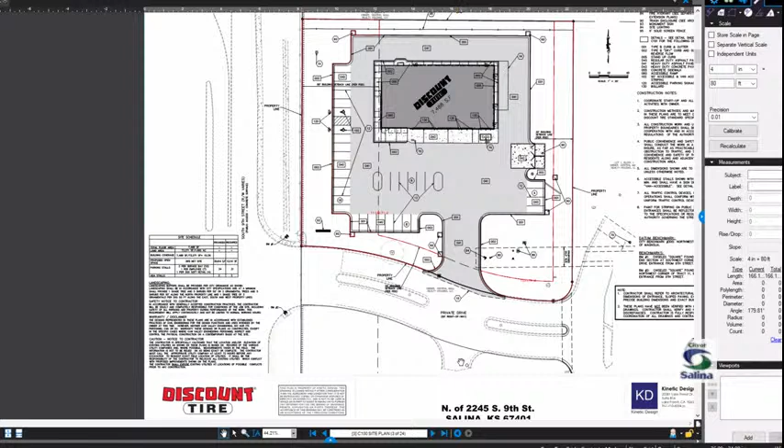Could you clarify your comment about the Japanese Zelkova, Mr. Baffa? Yes, it's a good drought hardy tree, but it is not native, and we've already lost 50% of our native birds, and they have not adapted to the Japanese Zelkova for nesting, nor for the bugs that might chew on a native tree. The caterpillars would then feed their offspring.

You know, I've said in the past that we need a wildlife-friendly plant list instead of just a xeriscape landscape list. And not a requirement, but I would like to see a native plant in there.

Okay. Questions for the applicant? No. Okay. If no questions for the applicant, Dustin, do we have any citizens? I don't see anybody outside of staff and the commission and people that are part of the project team. So I don't see anyone from the public. Okay. So we're going to close the public comment portion and move into planning commission discussion and action. So any comments or thoughts?